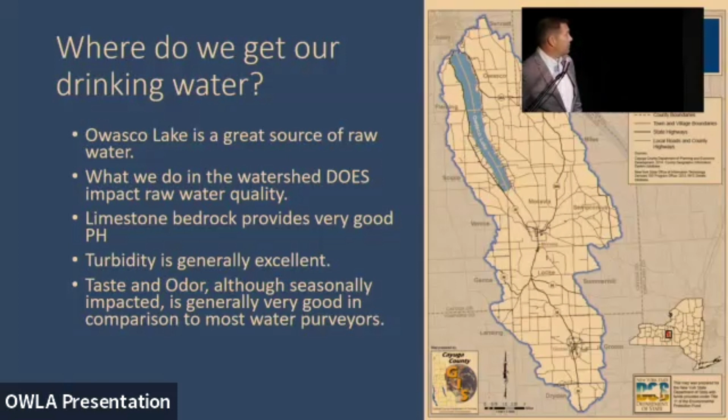The reason we're here today is Owasco Lake Watershed, and where do we get our drinking water from? Well, of course, it's Owasco Lake and the watershed that provides water to that reservoir. In general, I don't know if everybody realizes this, but Owasco Lake is generally a great source of raw water for our residents. We have good limestone bedrock to provide good pH to our drinking water. In general, our turbidity is excellent. In fact, our neighbor Finger Lakes are generally all good with respect to turbidity. The city of Syracuse is able to draw water directly from Skaneateles Lake with no treatment other than disinfection.

It is important to know, however, although our raw water quality is very good generally, and we'll get more to that in subsequent slides, what we do in our watershed or in any watershed does have a direct impact on water quality, and we heard a little bit about that earlier. In addition to turbidity and pH, our taste and odor is generally quite good, although seasonally in the past we have had issues with taste and odor around late season activity within the lake, like algae and other things that give off some flavor issues.

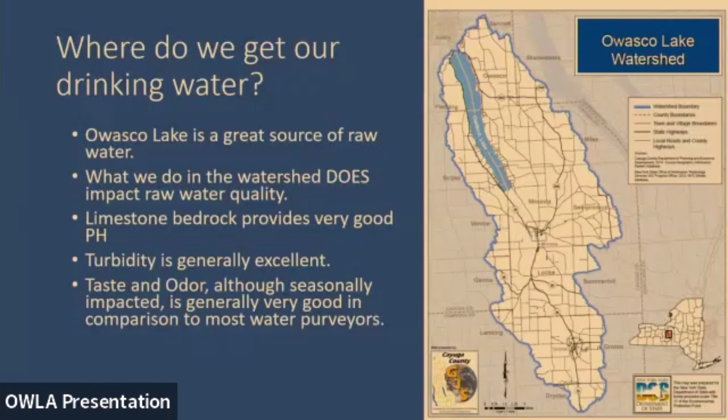But our powdered activated carbon system that we installed 6 years ago has done an excellent job. In fact, we get very few taste and odor complaints from our residents. I think the exception, one that I notice as well, is chlorine that we add as a necessary disinfectant to the drinking water. You can kind of smell that sometimes, especially if the water is warmer as you're drinking it.

So the picture here in front of us is a picture of the northern section of Owasco Lake. We have an intake crib located about 1,700 feet off the pier at Emerson Park. Ginny Kent just posted some pictures yesterday, which were pretty interesting. You could see how clear the water was, and you can, in fact, in those pictures, see, if you go out on the pier, you can see the intake pipe running along the edge of the pier.

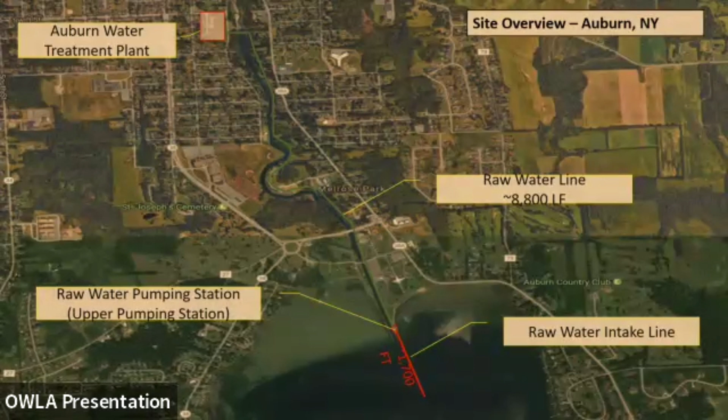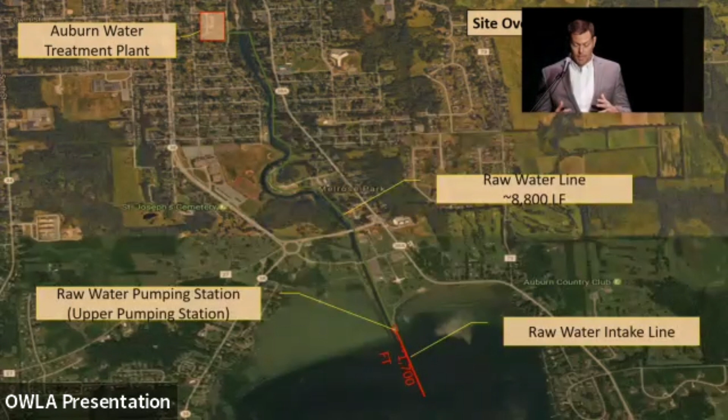So we have an intake crib in that location, about 30 feet deep in the water, and that's really where our first treatment process begins. That's where we add low doses of hypochlorite or chlorine right now for pre-disinfectant of the drinking water, and also that acts as a way to keep zebra mussels from forming on that crib and potentially clogging our intake. We'll talk a little bit more about that with future slides.

On average, we're drawing 25 million gallons of raw water out of the lake each day through low lift pumps at our upper pumping station. That's where our second treatment process can be turned on and utilized, and that's our powder activated carbon system. The powder activated carbon system is utilized in late summer, fall months as a way to adsorb the soluble microcystin that may be within the water column for treatment. And it also does an excellent job at removing other things that can cause taste and odor complaints.

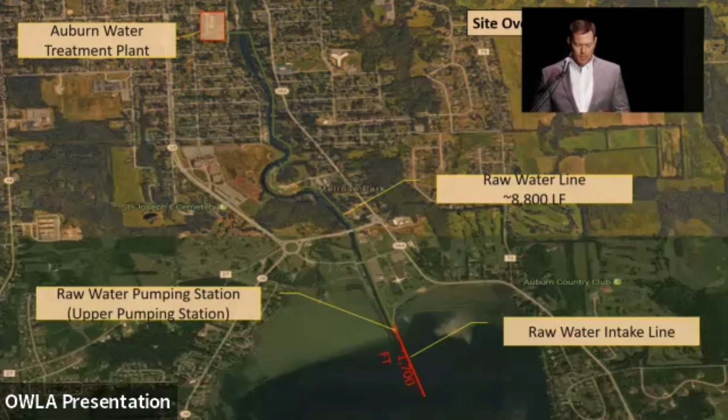From there, the water flows along the Owasco outlet to our water treatment plant, which is located in the upper left-hand corner here of the screen near Swift and Pulsifer Drive. Once the raw water crosses across the Owasco River right next to State Dam, it comes into contact with an operator who is on staff 24/7, 365. The city staffs this facility. And it really has two options.

It can one, go to our slow sand filtration plant, which is over to the right of that screen. That's the original water treatment plant constructed just over 100 years ago now. That facility has a rated capacity of around 7 million gallons per day, and we continue to use that. And it does a very good job in providing filtration of our drinking water.

The other option is to continue that water's path to a more conventional modern facility, where the flow path goes down the page over to the left to flocculation sedimentation tanks where there's some potential turbidity or other things within the column of water. We add a coagulant, which bonds all of those materials together until they get to a certain density where they fall out to the bottom of the tank and provides initial treatment at that location before going to our rapid sand filtration plant process where we're backwashing water on about a 3-day cycle

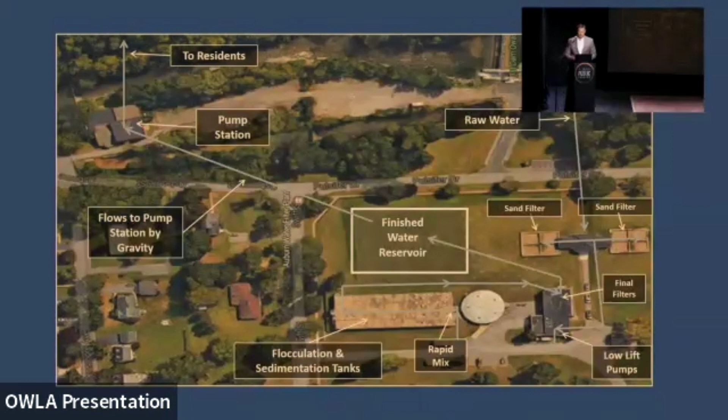before reconverging back in the slow sand plant where we do a final dosing of hypochlorite for disinfection, at which point it flows through our finished water reservoir for final contact time, to our pumping station and out to the residents in our community.

So who uses our water? Every resident and industry or commercial business within the municipal boundaries of the City of Auburn uses our water. And then in culmination, we have about 45,000 area-wide residents. The map here shows our full distribution system. All the lines in red are City of Auburn based customers. And just to the south, the town of Owasco also has a water treatment plant utilizing water from Owasco Lake. And they serve the town of Owasco as well as some residents within the town of Fleming.

The city is certainly proud to be the purveyor of water and the supplier of water to our residents and to the community. We've done this now for well over 100 years to everybody within the city, and then also a lot of customers just outside of the city.

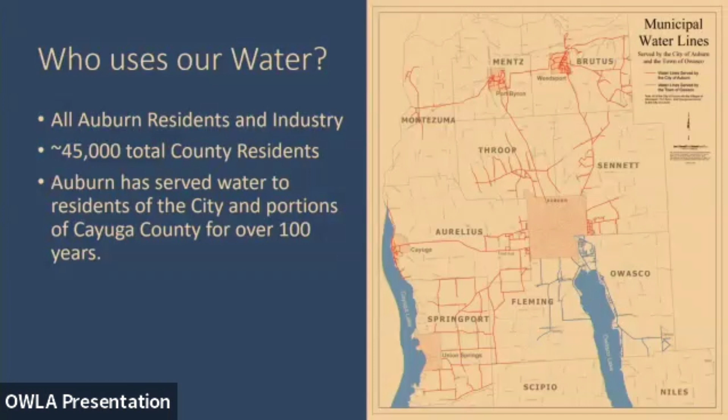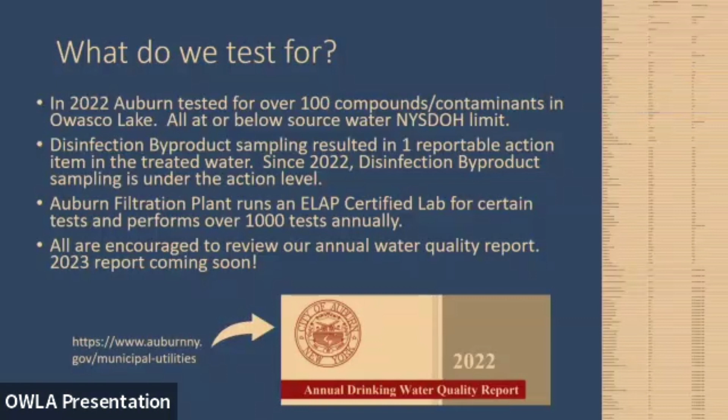You can see that more clearly on our annual water quality report, and I urge all of you to check that out at some point. But for all of the contaminants that we're testing for on an annual basis, in general, we are well below any of the source water limits set out by New York State Department of Health. So we are very, very lucky and very fortunate to have in our area such a great quality of water to use for drinking and for our residents.

In addition to the source water testing, we own and operate our own ELAP certified lab at the water filtration plant. And between our operators and our lab director, we're running over 1,000 tests each year on our distribution system to ensure that water is safe for the public to drink. Over the last 8 years, we've had very, very few issues with any of those test results.

Late 2022, we did have one reportable action, which was an exceedance in our rolling average of disinfection byproducts at one site out of the 4 different sites that we test within the City of Auburn on an annual basis. By the next quarter of sampling, despite having to reach out and notify all of our customers and then put forth a plan to make adjustments to bring that back below the action level, we were able to get that below the action level.

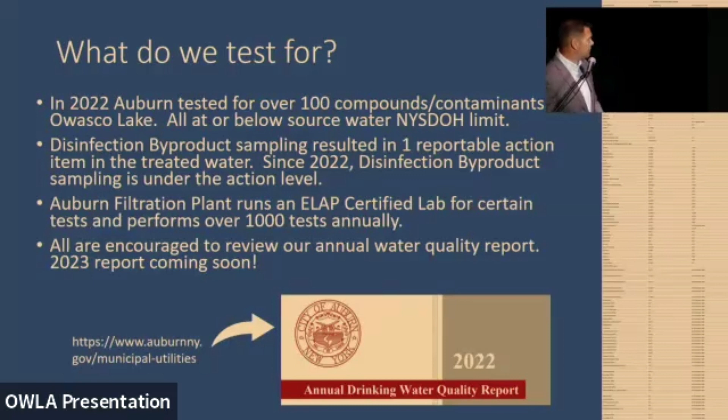So even though we're within compliance, we want to do better, and this will allow us to do better to ensure that the City of Auburn residents are safe, and we're setting up our wholesale customers with a lower level to begin with so that they're able to be successful. Feel free to visit our website. Our 2023 annual drinking water quality report will be out onto our website within the next month or so.

I think one thing that's interesting, I don't know if everybody understands this, is that our chief operator and a few other operators that we have at our water treatment plant hold the highest level certification that the state issues to operators. With that certification, our staff can be the chief operator of the New York City water treatment plant, Buffalo, City of Rochester. It's the same level certification. That can take operators up to 10 years plus schooling to achieve.

So turnover can be very, very difficult, and it's a challenge across the state and across the nation to have certified, trained staff, and we are in very good shape with respect to that, and we're always working on staff development to ensure that that does not become an issue for the City of Auburn.

We're very thankful for our wholesale customers that we serve, all of our customers that we serve, and we're going to be working on some new wholesale standardized agreements over the next few years, so that will be an upcoming challenge working through those agreements.

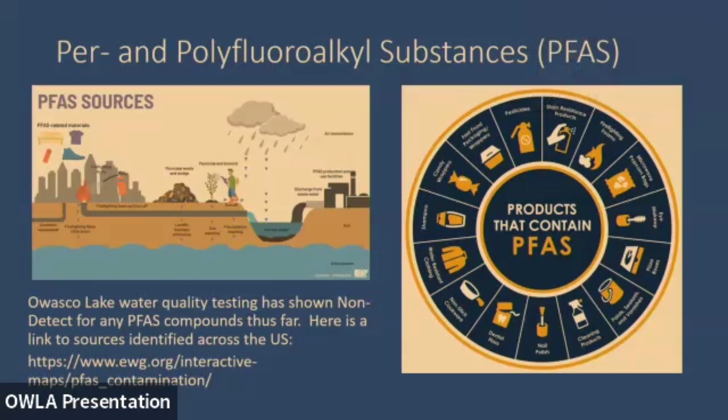The link here, I encourage you guys to check it out. It's kind of neat. It's a nationwide interactive map that allows you to zoom in on potential PFAS contamination sites. And if you zoom into our area, one of the spots that will show up is the Seneca Army Depot on Seneca Lake. So that's a potential contamination site, just for reference.

The first phase, we looked at our carbon that we're using to absorb soluble microcystin. And we tested multiple different carbons from all over the country that are available on the market. And we found that the carbon we've used in the past and we're going to continue to use was the best at absorbing soluble microcystin. So that was good news.

The next phase was a little bit more tricky. We were trying to understand what the limitations were of our carbon system and develop operational curves around how do we best target and treat for microcystin at variable concentrations. Well, first, there's really no good way to real-time understand the level of microcystin in the water. There's no meter that tells us that.

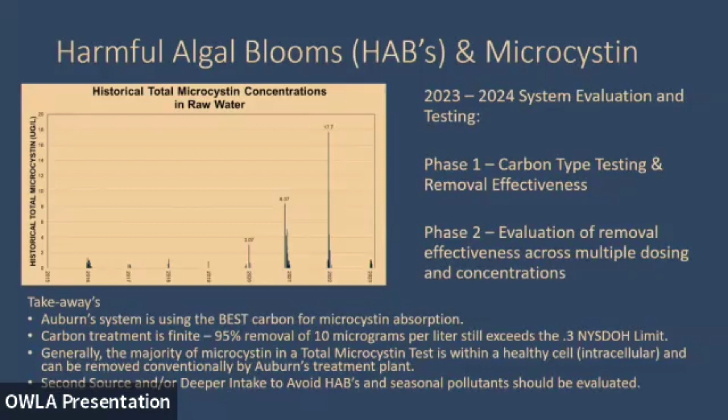But the big takeaway from that, and I'm not trying to tell you that it's safe to go play in the water that's green along the shoreline, but microcystin is really found in two forms.

One is within the form of a live, healthy cyanobacteria cell, and one is in the soluble state that happens when that cyanobacteria cell dies. The good news is when it's in the live cell, when microcystin is within the cyanobacteria cell itself, our conventional treatment plant process and filters are able to capture that microcystin

on a live cell. And generally what we find in the lake, if we were to go grab a scoop of pea soup, it might be 1,000 micrograms per liter of total microcystin, but it's generally a healthy bloom, and 95% of that microcystin is bound within the live cell, which can be treated conventionally at our treatment plant. So that's excellent news. And it's interesting.

So we need to do a little bit more study, because what we're also finding, even at these lower concentrations, not 1,000 — they're high concentrations, but not like a shoreline bloom high — is that relationship between what's within the healthy cell and what is soluble, which is more difficult for our conventional process to do. We don't really completely understand that relationship yet.

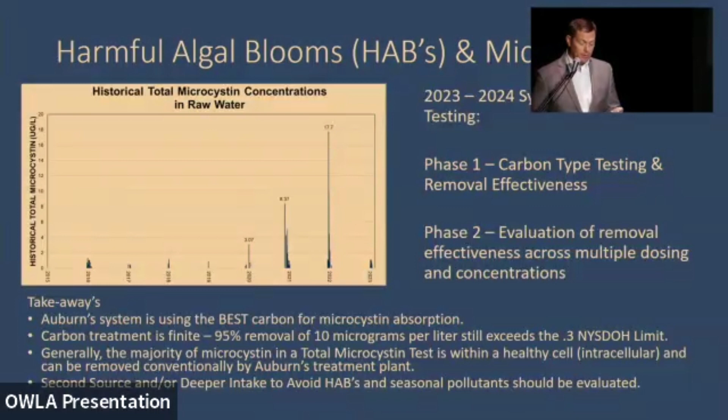We've discussed this with the State Department of Health to look a little bit deeper into the various redundancies that we have at our treatment plant. It's pretty clear that we're not solely relying on the powder activated carbon system to do all of the removals of the total microcystin, and that our conventional process is still doing a good job in removing those live cells, and even some of the soluble, I'm sure.

Another program that we're working on right now is a lead service line program. The US EPA put out guidance, and the State Department of Health has also adopted this guidance, where every community has to develop a full lead service line inventory. And again, the city of Auburn is in very good shape here. For some reason, our forefathers, when they were developing design standards and we were building out our system, went from installation of galvanized lines right over to installation of copper lines.

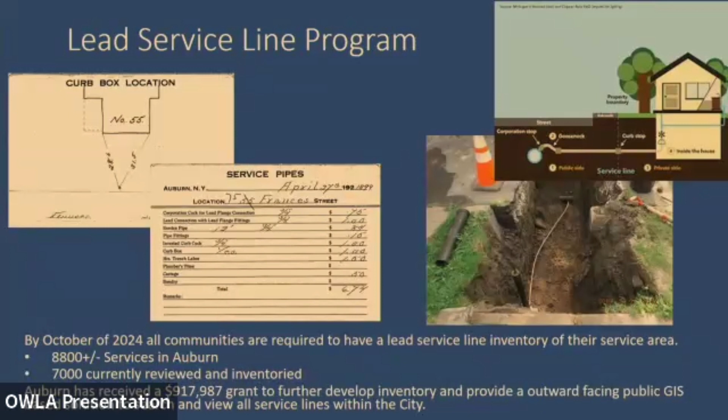Cities of Buffalo, Chicago, for years they installed full lead service lines. And it may have had something to do with material availability and costs. But I have some folks in the distribution system who have been working in Auburn for over 30 years, and in their entire career, they've only found one full lead service line. And not one of our records in our old service tap cards indicate that lead service lines were installed.

I'll temper that with the fact that as you run a galvanized line through the ground, that material is rigid. So as it gets close to the service main, our crews in the past did use a small lead whip to make that final malleable connection to the main. The US EPA and Department of Health don't characterize that small section of lead service to create a full lead service line. So it's likely that the city of Auburn will have very few lead services.

We certainly work to upgrade our system, and during road programs, we are replacing those old galvanized lines and subsequently getting rid of even that small lead whip. But generally, we're in very good shape. We've got about 7,000 of our 8,800 services completed at this point. And we just received a grant for almost $1 million to further analyze and do field investigation.

We have very good records of our own municipal right-of-way services, but the service from the edge of the right-of-way into the house, we don't have as good of records. So we're going to be working on building that out, getting it into a GIS-based solution that allows the public to access for their home any bit of records that we have on our service lines.

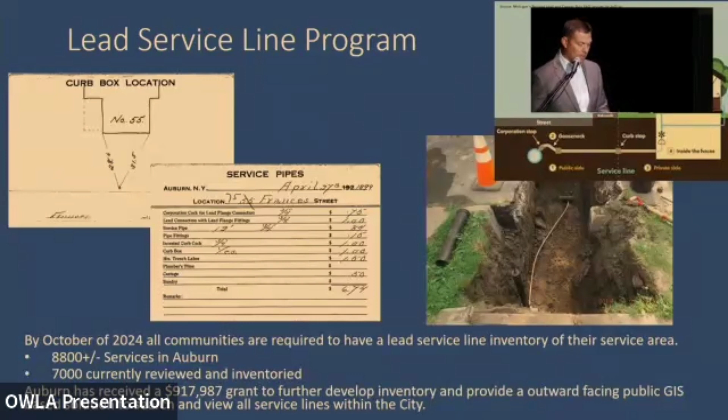Some current projects and initiatives. I mentioned the chlorine dioxide generator that just arrived this week, actually, and we're going to spend the next month or so getting prepped and ready to switch over our zebra mussel control system with that technology.

City Council has approved, and we're well underway with renovating our early 1900s slow sand filtration plant, turning it into a modern-day water treatment facility. Over the last 100+ years, this building has seen very little reinvestment, and over the next few months, we will be getting close, and maybe you guys could all come out for our ribbon cutting ceremony this spring or summer. It's a really, really cool facility, and it has served us well, and we're looking forward to it continuing to serve us well into the future.

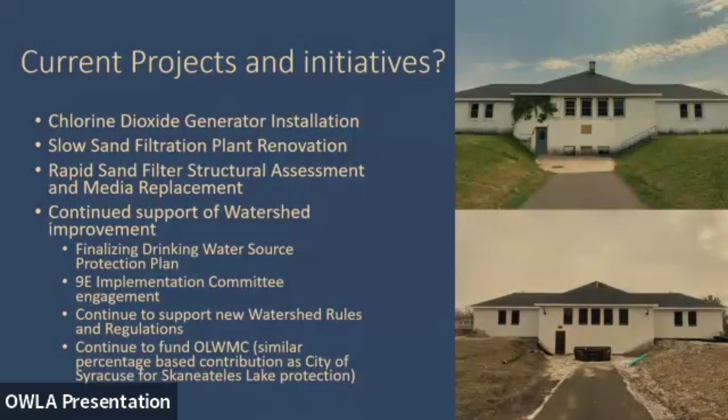As part of that pot of money, we're looking to allocate some funds towards replacing the media within our rapid sand filter beds and doing structural assessment of the concrete around them. We're going to continue to support watershed improvements. It's a very important concept for the city of Auburn, and certainly important for the residents and all who drink the water. We're still waiting on finalizing the drinking water source protection plan. We actively participate on the 9-element implementation committee. And our council in the city is going to continue to support the new watershed rules and regulations as written by the local steering committee, and continue to fund the management council.

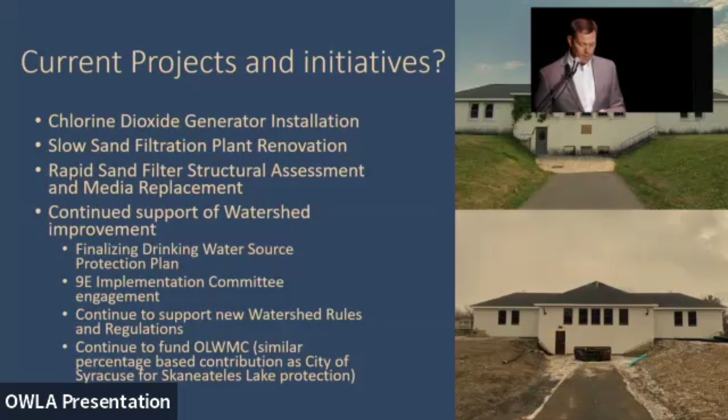We did a quick analysis of the total expenses that the city of Syracuse has for their water system versus how much they contribute to their watershed program on Skaneateles Lake and found that it was about 8% of their total budget. And when you do that analysis with the city of Auburn, even though we also have a modern treatment plant facility, we're contributing that same percentage from a dollar-to-dollar standpoint. So we're very active in trying to fund and participate in our watershed.

Some future projects: we just received notification from DEC that we were successful in obtaining a non-point non-ag grant to study the Owasco Lake HUC 12 sub-watershed. And the reason we chose the Owasco Lake HUC 12 is the amount of phosphorus per acre was the highest contributing sub-watershed within the entire Owasco Lake watershed. And we're going to look at potential of siting stream gauge stations maybe at Veness and Sucker Brook to better understand loading into the lake of different nutrients.

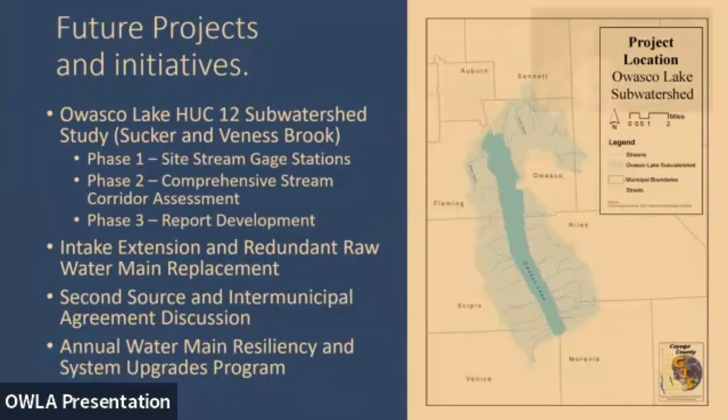And then really focus in on comprehensive stream corridor assessment of Sucker and Veness Brook, as well as maybe pick a few of the tributaries along the way in coordination with Soil and Water Conservation District, and develop a report that will allow us to hopefully be much more competitive on implementation projects into the future.

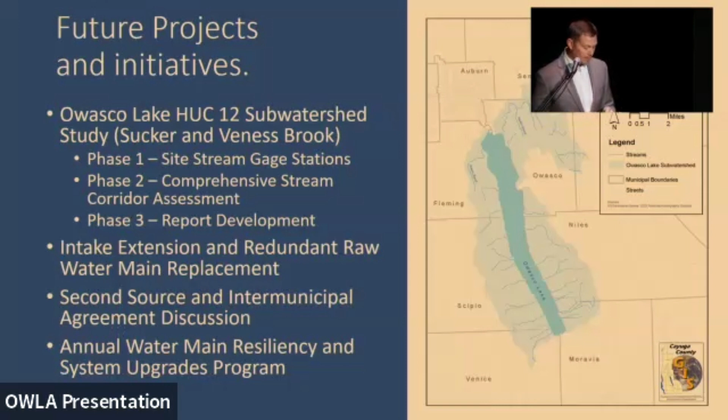You know, microcystin isn't the only issue that we have to worry about potentially into the future, and intake extension has been something that we've discussed, and we're going to continue to look at that. A second source has been brought up. I think it's been talked about for years, and certainly not a bad idea when you're just thinking about resiliency and redundancy. So what can you do to help?

I'll just wrap this up here quick. I think I'm over my time allotment.

Everything, and you've heard this before, everything we do in our environment, no matter where we are, has an impact on water quality, and we're all in a watershed. For the lake watershed, if we can stay in compliance with state requirements around our septic systems, that would be great. And a couple of primary focus items I think are important. One is to save our waterway buffers or install buffers along our waterways. We can't control temperature, and temperature's on the rise, but if we can build shade and natural habitat around our stream corridors, this will help to mitigate some of that, as well as assist with nutrient uptake right near our waterways. And then don't over-fertilize.

Don't fertilize if you don't have to. You know, weeds are all in the eye of the beholder. My lawn is filled with dandelions. It's still a lawn. Anytime you're applying nutrients, anytime you're applying pesticides, make sure you do soil tests. Make sure what you're targeting for that plant is exactly what the nutrient is that you're giving it. So with that, I'll wrap it up.